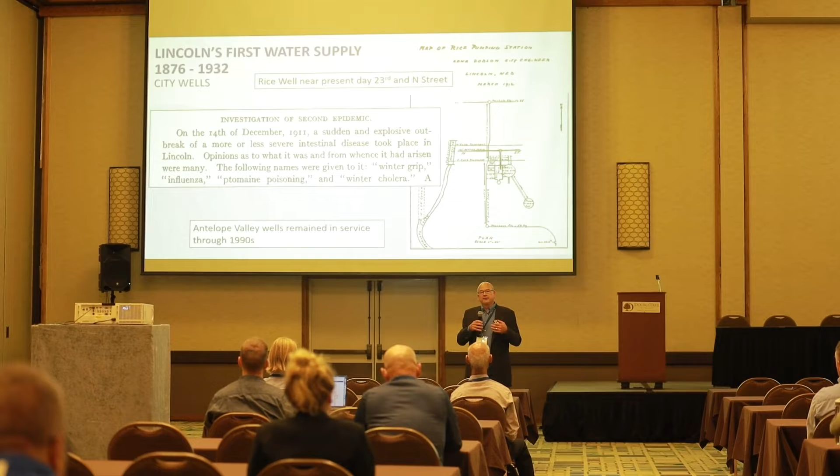This is all about how Lincoln is going to supply water to the masses into the future. I like to start off with a little bit of history, and then I'll set this up by talking about our planning process - how do we come up with the amount of water that is projected that we need to serve our customers. And then I'll end up with the process that we went through to get to a tentative decision.

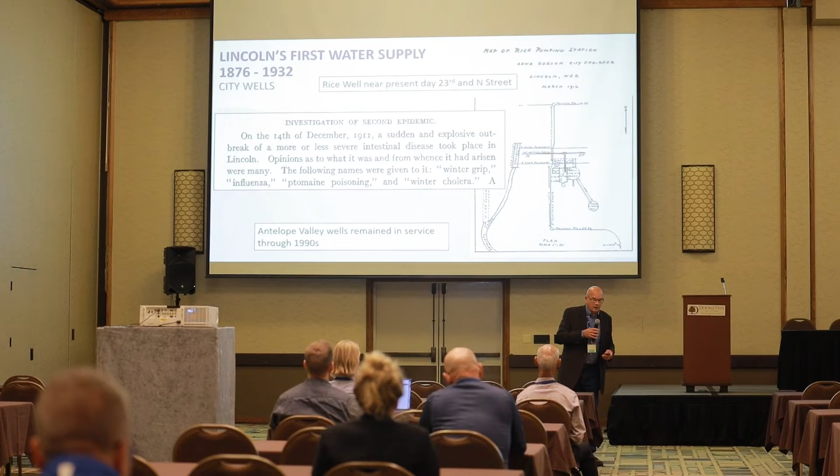So I warned somebody after lunch I was going to start off with the first slide talking about influenza, stomach illness, and those kinds of things. Maybe that's not a way to start an afternoon session.

Our history started in Lincoln in 1876. That's when we municipalized the water system, and we used a series of wells. These wells were cistern-type wells, very large diameter, dug down into the ground, bricked up, pumps were put in them, and then water was pumped, no treatment, out to our customers.

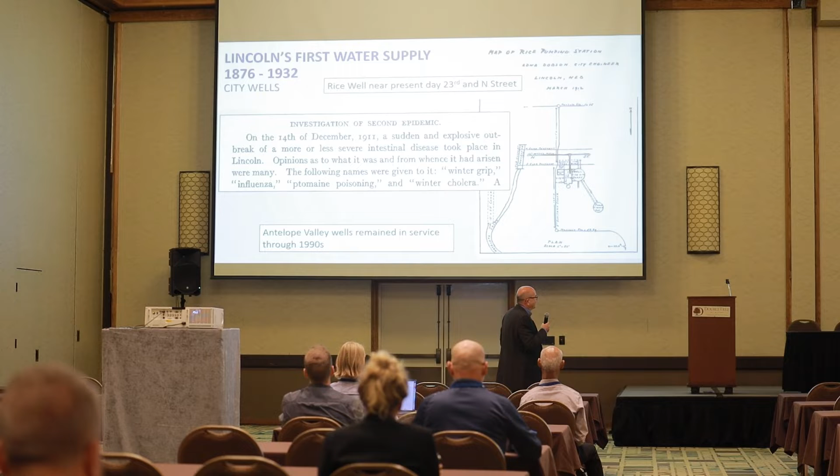There were 2 incidences in history of some pretty serious outbreaks of typhoid fever, as it was termed back in the day. This was an excerpt out of one of the reports that talked about one of those incidences. It's interesting how they describe it: a sudden and explosive outbreak of more or less severe intestinal disease.

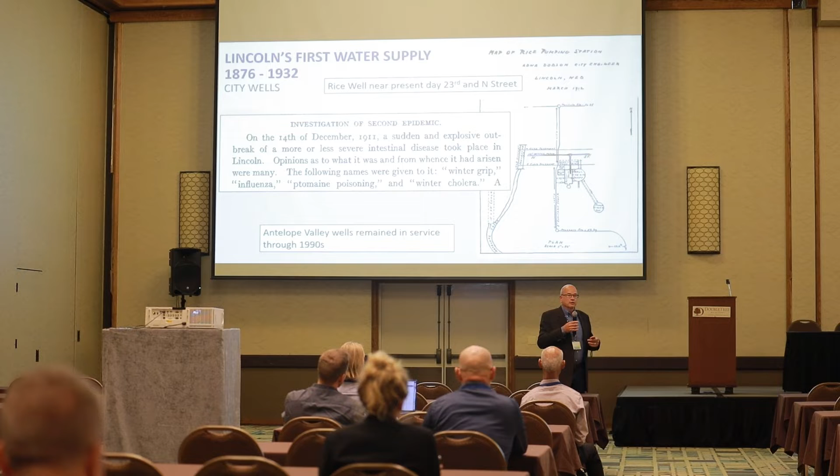What we learned was - this is a diagram of the well, and this is a sewer line that went past the well. Because of some heavy rain events and a broken sewer main, there was sewage that went into this well, and that's what really caused the sickness.

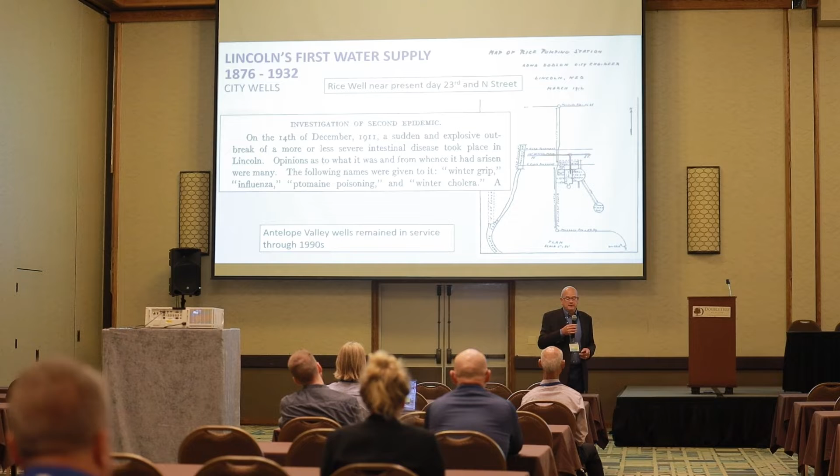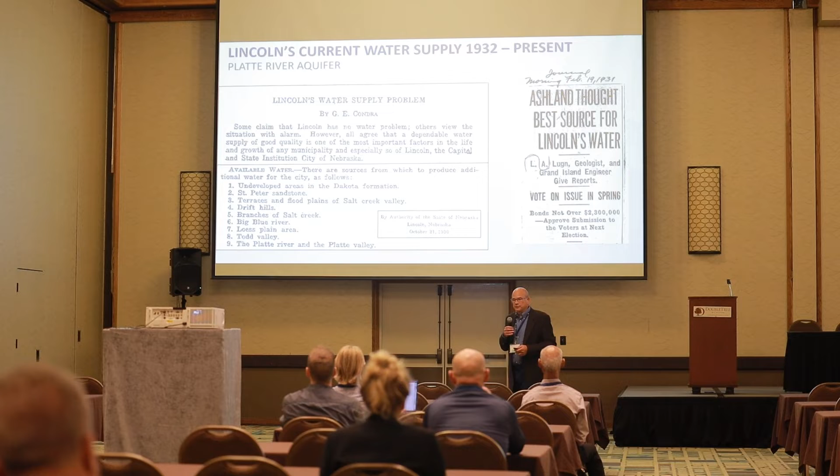We supplied Lincoln with wells throughout the city through about 1932. Then our forefathers and foremothers realized that as the city was growing, the water quality and water quantity in the Salt Creek Valley area was just not sufficient. Capacity or supply was not sufficient, and the water quality was very poor. A lot of these wells were in the Dakota Aquifer, so high dissolved solids, salt, and folks came to realize that that wasn't going to be a sufficient supply for the city of Lincoln.

What I found interesting in both of these examples of our early days of supplying water was EPA wasn't around. The public water supply industry had not evolved by that time. This was all university people weighing in on: is there enough capacity? What is the water quality? How do we track down people getting sick? So all of this was really coming out of the university at the time.

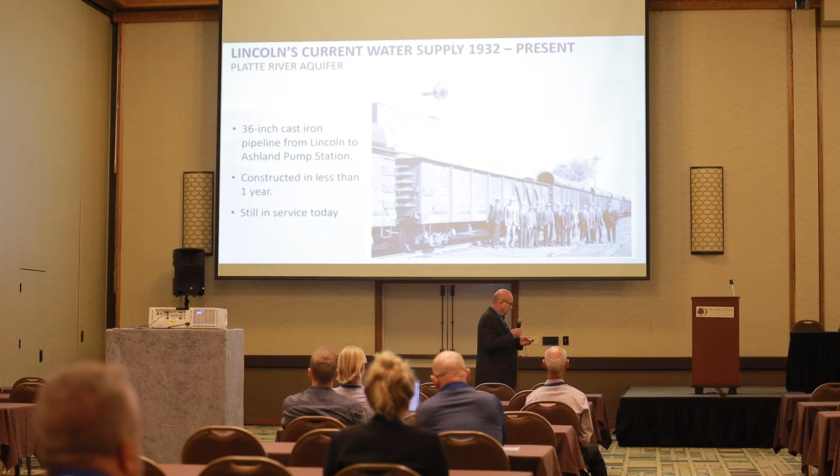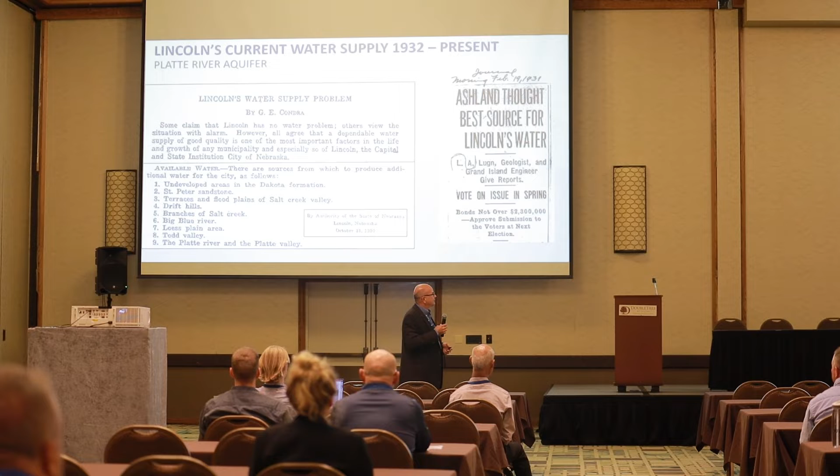If you go back and remember this list of potential water sources that were being tossed around back in the late 1920s and early 1930s, this list sort of looks similar to the list that I'm going to talk about with our Water 2.0 project. The point is that there are lots of different water sources, and some of those are questionable quality, and some just simply don't have the capacity. So it's interesting that essentially 100 years ago we were looking at what the next source of water was going to be for the city of Lincoln. We're doing that now as we speak.

This is an example of a train load of 36-inch pipe once we decided to move to Ashland and develop that supply along the Platte River. This was a load of pipe that really joined the city of Lincoln to the Ashland well field, Platte River well field. That pipe is still in service today, runs down the shoulder of Highway 6 for the most part, goes down into our A Street reservoir system, and provides good service for us today.

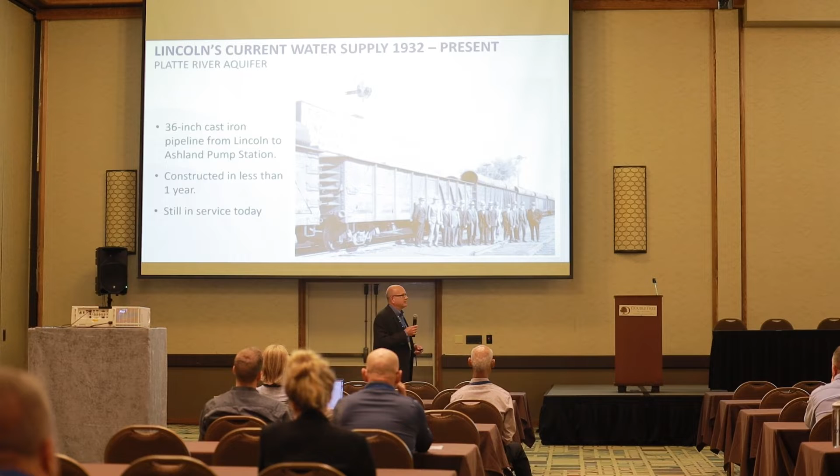What's really interesting is that pipe was laid in less than a year. And I think most of us in this room would agree that that's almost an impossible feat in today's world of permitting, supply chain issues, and those kinds of things.

So things were fairly good. When we developed that well field, we started to send water from the well field down to Lincoln. But we noticed, or our customers noticed, that the water was turbid, and complaints started coming in. We did no filtration and no treatment originally when we developed that well field. So it was pretty obvious that we needed to do something to remove iron and manganese.

There's parts of this early plant that was built in 1935 that are still in service today. In fact, we've got a project right now to get into some of those original filters and take a look at the understructure of the filter to see if that structure is still sound. But the filter media that was put in the early 1930s is still in service today, giving very good performance in terms of iron and manganese removal.

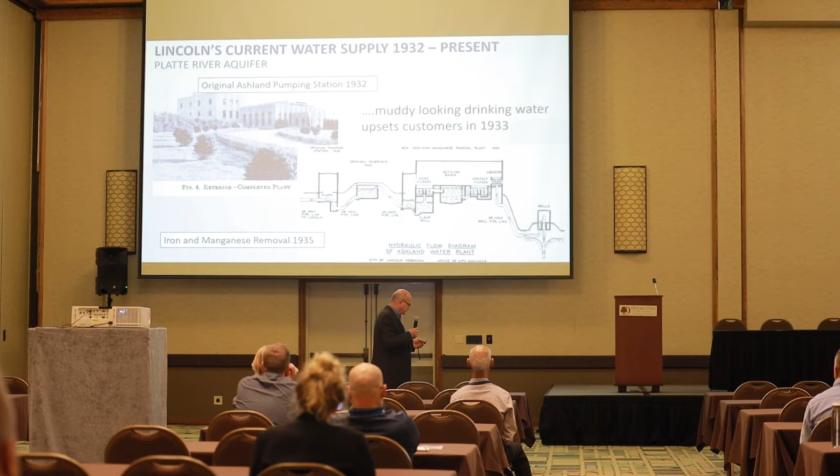So a little bit about water use trends. Several of us talked a little bit about this in some sessions yesterday. A lot of folks don't realize that per capita water use has really declined. And this is not unique to Lincoln. MUD would have this same trend, and this is a trend you see across the country. In fact, Doug Whitfield made mention yesterday of one of the effects of declining water use, which is revenue.

So it's always a hard message to go out and promote water conservation with your customers, while what's happening in the background is declining revenues. This hasn't really hit Lincoln Water so much, but there are water utilities, especially out west, who have really had to grapple with this issue. So you charge by a gallon of water, and if your customers are using less water, you've got all these fixed costs associated with your facilities, so the rates go up.

So we've gone from in the early 1970s, 200 gallons per day per capita, to 132 in present day. And this is total water use - all the water use, commercial, residential, industrial, divided by the population. About 65% of this is used at the home.

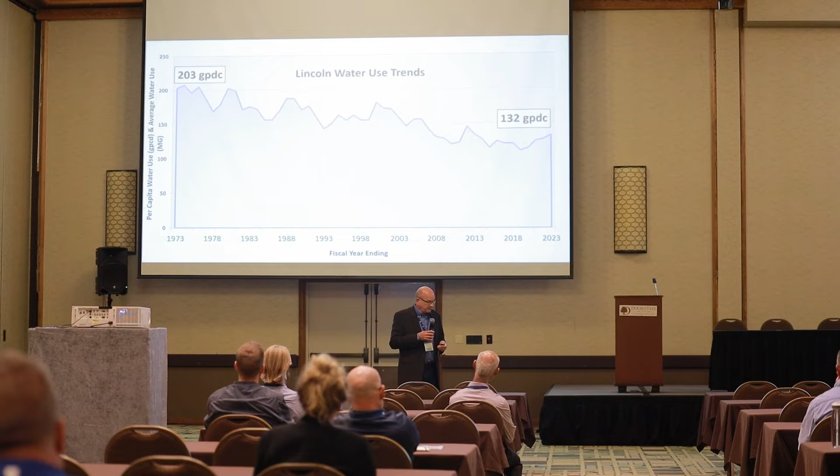So when you splash some other trends across this, what's really telling is that as population has increased - for Lincoln, a little over 1% a year population increase - with this trend of declining per capita water use, it's very telling that our average day water use has remained flat during that same period of time.

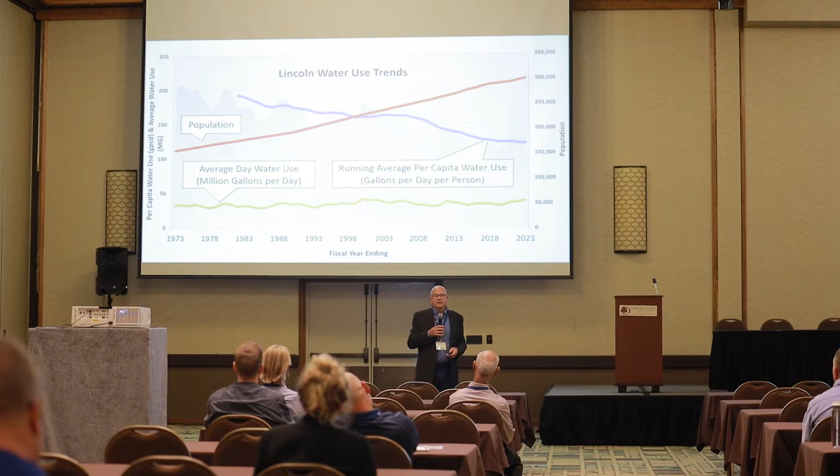And it's interesting that even in times of dry periods, our per capita water use has declined. You might ask why. Probably, and I think mostly, just an awareness that our customers have on the value of the resource. There's been certainly some technology - I always say, love them or hate them, automatic irrigation systems, but if maintained properly, they can actually efficiently apply water to turf. So there might be a little of that going on also.

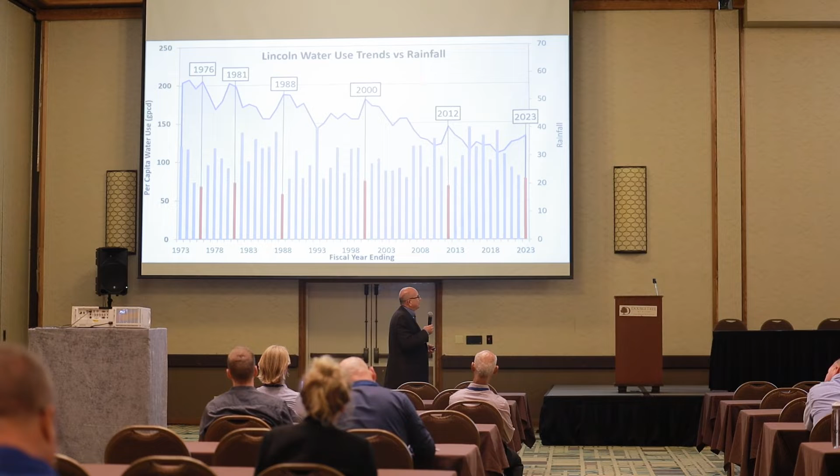So our historical water shortage events - this is really what's driving us to figure out how much water do we need. Like it or not, our customers are the ones that decide how much water they're going to use. We can influence that a little bit with rates. I talked yesterday about Lincoln's water conservation rate, or as Rick Kubat explained it, it's an increasing block rate structure. So in our residential rates, there are 3 blocks of rates. The first block is the cheapest, and it's intended to really target indoor water use.

It's really this idea of summer or seasonal water use that drives the need to have enough source water. There are other things that drive our facilities. Peak hour use is mostly tied to water storage in our distribution systems. Daily use is more about pumping and transmission, but seasonal water use is what drives our need to make sure we have enough source water supply.

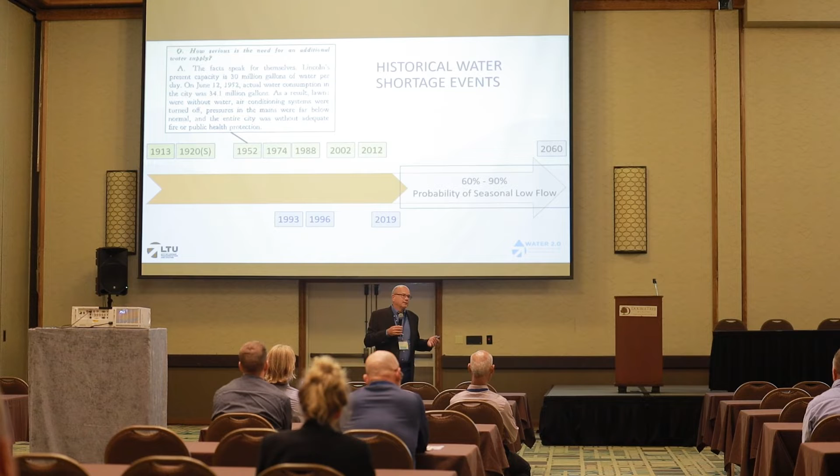Yesterday I showed the slide about the article in the Huffington Post, from research out of the University of Florida, saying Lincoln was third nationally for significant water shortage risk. I mentioned I'm not sure the research was sound, but the premise was that the Platte River goes dry — it disconnects itself in a lot of dry years, around the Grand Island area. So if your water source is the Platte River, I can see how you'd reach that conclusion.

Our mandatory conservation efforts are essentially designated-day watering, again targeting turf irrigation. There was information yesterday at the last session from County Extension saying 30 to 40% of water is used in turf irrigation. I'd say on a hot summer day with extended dryness, you could be over 50% of the water we're producing and sending to Lincoln used for turf irrigation — very significant. So here's the flood event.

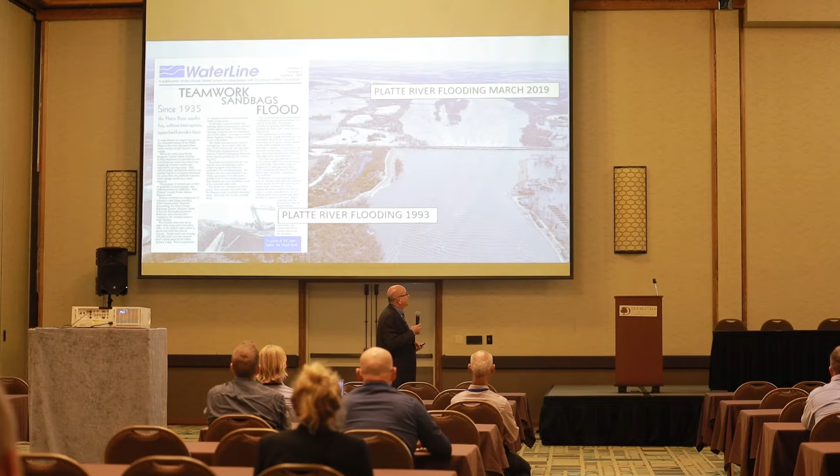The photo shows the 2019 event, and it was just a vast amount of water that came down the system. I think those of you involved would agree it just kept coming and never stopped. The peak was a long-lived peak, and it prevented us from getting out to our facilities. We had to mobilize the Air National Guard to fly folks out to our well fields to operate valves and get our wells back operating. It was quite an event. We spent probably a week flying in helicopters and airboats to operate our system.

And in 1993, we were in the process of putting in a large transmission main, a second transmission main out to our well field. That got taken out. So these events are very, very significant and can certainly cause water shortages.

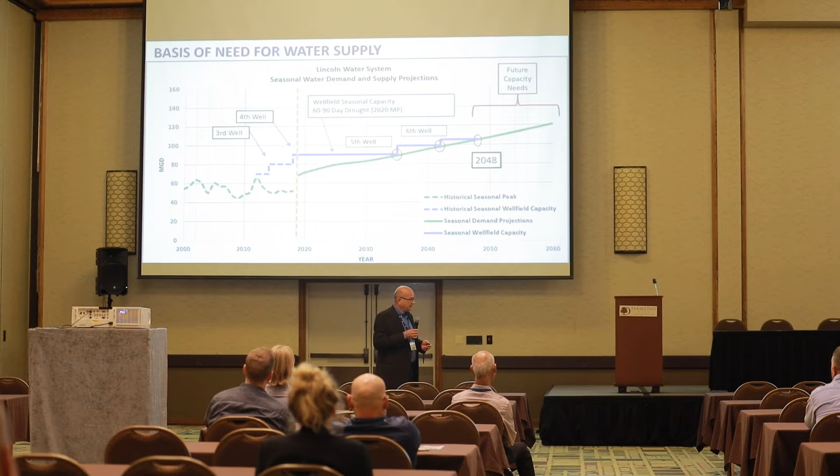This is an example of how making these adjustments for climate change using these climate prediction models can really influence a number, so to speak. This is on the supply side. If we use the historical database and look at the time interval for these events, you can calculate a probability that they may occur in the next planning period. We're looking at a 40-year planning period, and the recurrence interval on these events can then be used to determine the probability that the event may occur. This particular event is a 90-day event.

So where the average stream flow would be 1,500 CFS, 700 CFS, and 200 CFS, if we use the historical data to do the evaluation, that's the probability those events may occur—again, 90 days of the river being at 700 CFS or less. The reason we chose 700 is that's our in-stream flow rate. When the river begins to get in that 700 CFS range or below, that could be a point where Lincoln exercises its right to that amount of water in the stream. Not something we've done, but it's sort of a tool in the tool bag for us.

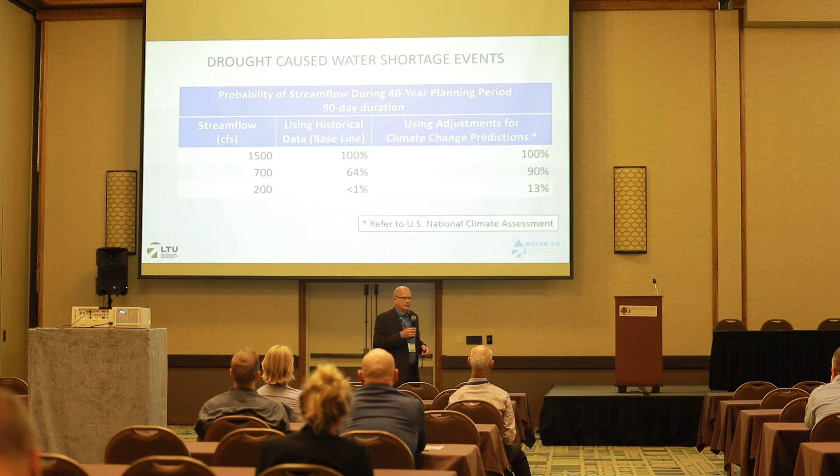But when we look at climate change and make the adjustments, you can see how the probabilities are affected. What's interesting is in that 200 CFS—historically we've not seen 200 CFS in the Platte River for a 90-day stretch, so the percentage is essentially nothing; the probability of that happening is essentially zero. But as we start to put this idea of climate change into the model, you can see there becomes a chance that the river gets down to that level for that long a period of time. That's pretty significant—would be very significant for us.

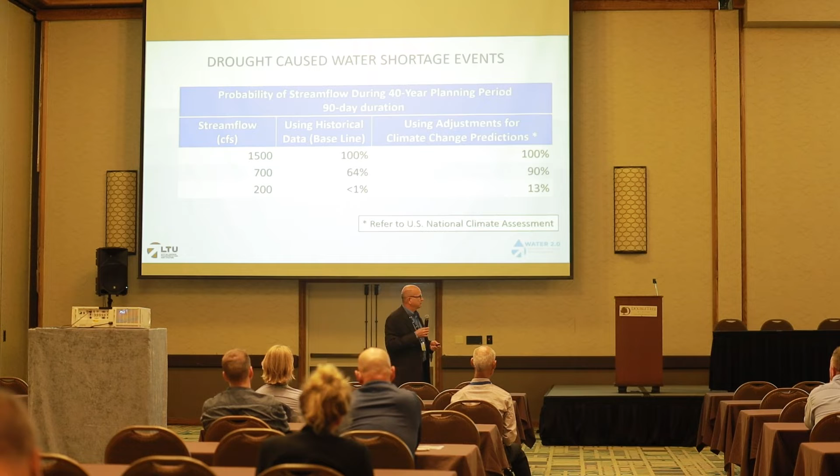So that's kind of the setup, a little bit of the history of the utility, how we plan and make projections for what our customers are going to use, and the performance of our current well field.

Knowing all this, we've been talking about a second source of water supply for several years. It's not really new in our vocabulary, but it was certainly time to pull the trigger. Mayor Gaylord Baird had the foresight to say this is something her administration was going to start working on. She commissioned a water source advisory council of a really diverse range of folks with diverse backgrounds - a great example of what I like to refer to as diversity of thought.

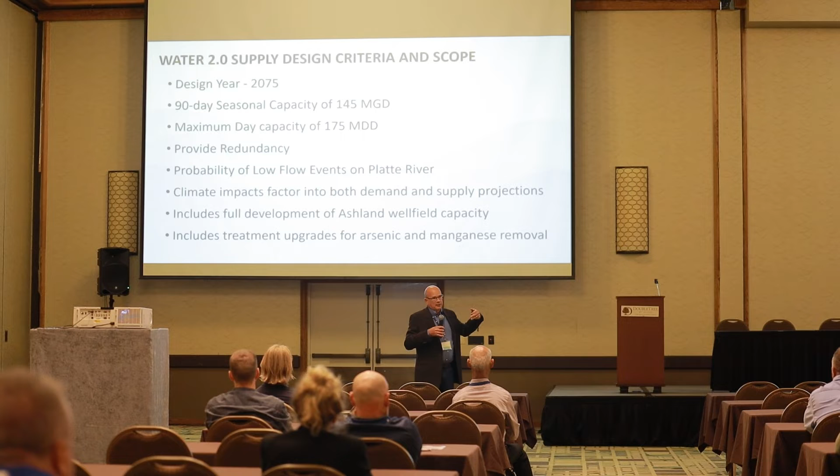It looked at these low flow events on the Platte River. We included climate impacts into the supply and demand projections. One thing to keep in mind - our Water 2.0 comprehensive project anticipates building out full development of the Ashland well field capacity, which also includes treatment upgrades so we can treat this additional water coming from the Platte River well field, targeting arsenic and manganese removal. So this is really the Water 2.0 scope and design criteria.

So the activities that the Water Source Advisory Council went through - by the way, we had a long debate on whether to call them a council or committee. We ended up with council, and unfortunately, whenever you say council, people think the city council was involved. We had representatives from the city council, but this was an entirely separate group of people.

The first order of business was to develop factors - what was important to each of the stakeholders on that committee as they think about their constituents and the people they would have to go out and educate on this whole concept of developing additional supply for the city of Lincoln.

Within two meetings, this group was able to define the factors or criteria that were important to them and what we wanted to evaluate with these different alternatives.

We wanted them to consider the universe of alternatives. We didn't want somebody to say, well, why didn't you look at this source of water? How come you didn't consider that? So we initially looked at 14 different sources of water, did an initial feasibility evaluation on all those alternatives, and eventually narrowed it down to 7.

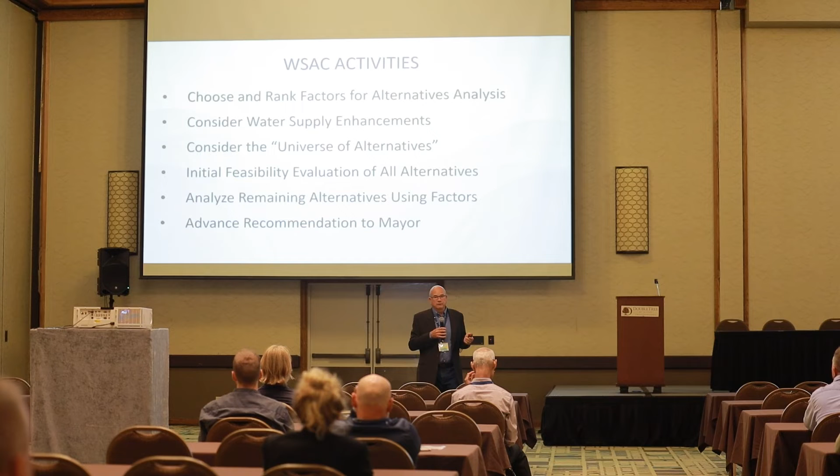Aquifer storage was another one of those supply enhancements. We realized that technology is something worth looking at, but it certainly wouldn't solve our problem to get us to 2075 and 145 MGD capacity.

And then finally, really sit down and hammer out this short list of alternatives and make a recommendation to the mayor. That was the charge statement.

So this is a list of the factors that were used and that the committee came up with. Really, staff and our consultant who facilitated this, we sort of stayed out of the mix. Our director and assistant director were representatives on the council, but we really stayed out of the mix.

And at times that was difficult because we had our own opinions. We, of course, know the business, but we found a way to just sit back, provide facts, provide figures to the group, and let them sort through all of these different factors.

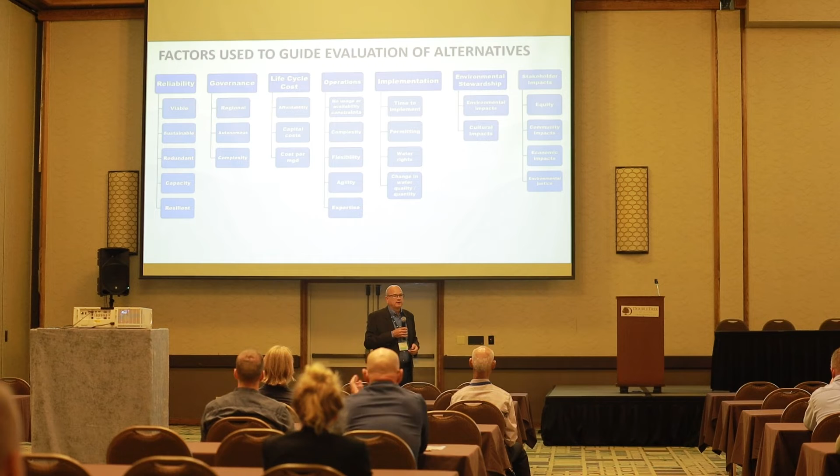We even had sub-factors under those main ones that the council worked through. So every month we would have a meeting and cover two or three of these different factors, and we would actually have the council rank them. So it was a very objective process, and I'll show you some examples here in a minute.

So this was kind of the universe of alternatives. I had mentioned earlier with that first or second slide - that list you saw there kind of stacks up to some of these alternatives. There is water out there, near Lincoln, mostly groundwater sources, but the capacity of those sources is just not sufficient to meet that design criteria we were trying to meet.

Water quality, sometimes questionable. So in really one meeting, as we went through each of these and talked about them from a technical aspect, the council got to this short list of seven alternatives to look at further. So, expand the existing well field, our Platte River well field.

Look at off-channel surface water reservoir, which was mainly storage. So simply, during winter periods or off-peak, we would be taking water from our existing Platte River well field, developing a storage reservoir, and then using that water the next season. That definitely can be done, has been done, but in the end didn't rank so high.

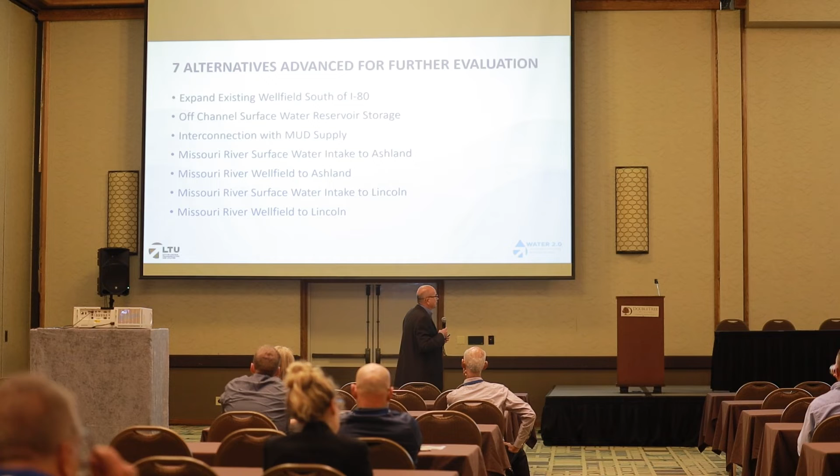2 of those alternatives took water from the Missouri River, took it up to our Ashland facilities, and then back down through our existing transmission to Lincoln. Of course, the issue there is redundancy - we're still relying on a portion of our facilities to make that happen.

2 of them along the Missouri River were to treat at the river and then deliver treated water back to Lincoln. And in each of those groups, we looked at a surface water intake versus a well field. So those were the 7 alternatives that the council worked through.

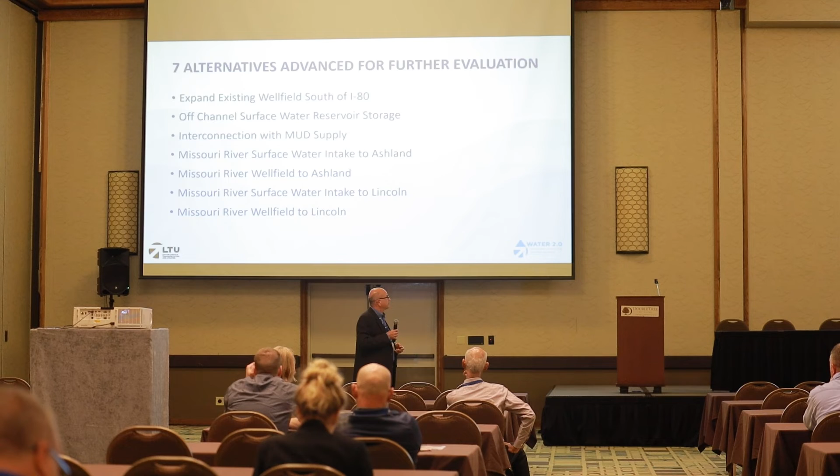This is just a couple of examples of how these were scored. So at the end of the discussion, where we would present again on a factual basis the information that underpin these factors, the council would then rank using what they believed was important, thinking about their constituents, their expertise in their particular area, their experiences, rank each of these factors.

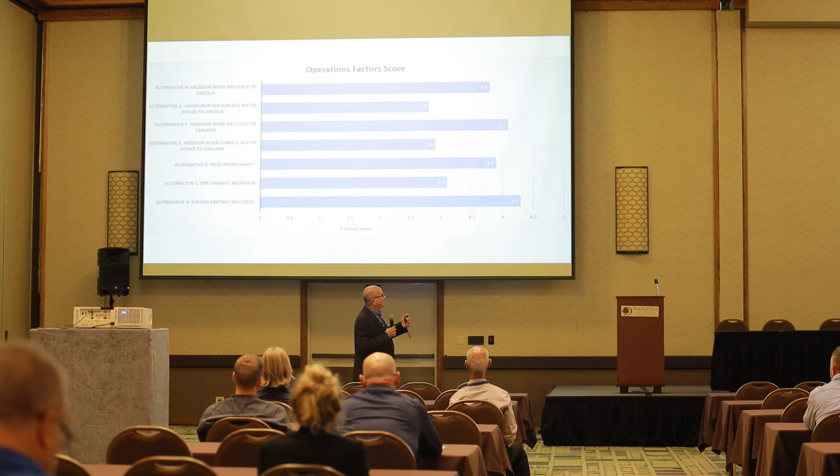So here's an example of the operations criteria. How easy or difficult were these sources to operate? This one was a little hard for me to stand back, but it's interesting. You can kind of see, for those of you that are knowledgeable of what it takes to operate a surface water system versus a well field system, something that has an open reservoir on it, the council did sort of line up as you would expect.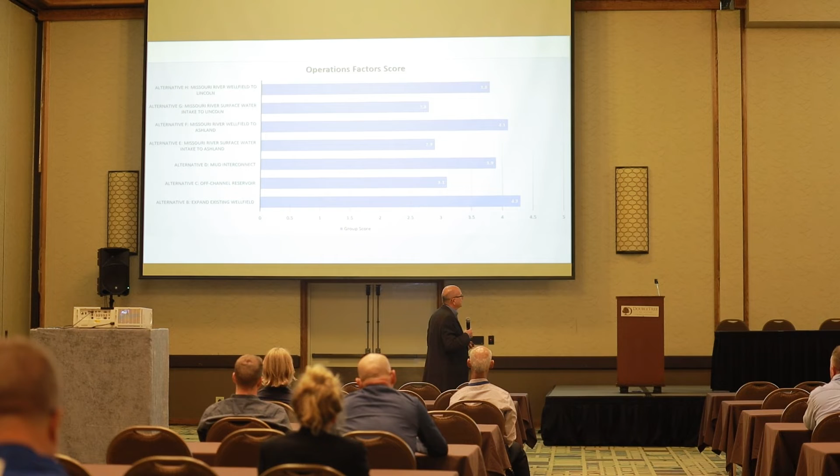So you can see that the surface water, both the surface water intakes on the Missouri River, ranked low. That off-channel reservoir I mentioned also kind of ranked low. Anytime you're dealing with surface water, it's a whole new set of regulations that you have to abide by.

Here's a governance group, and I asked our MUD friends yesterday if they were opposed to me showing this, but this really got at an idea that was pretty apparent, that Lincoln and this group representing Lincoln were very keen on making sure Lincoln maintained its autonomy, that we were not beholden by contract on a supply of water.

Now, in the public water supply business, that isn't necessarily how it works. I think there are examples. Matter of fact, there was an example, I think, down in Arizona recently, where the public water supplier turned the valve off to a small group of folks that, by contract, were being supplied water. But that doesn't normally happen, but it can happen.

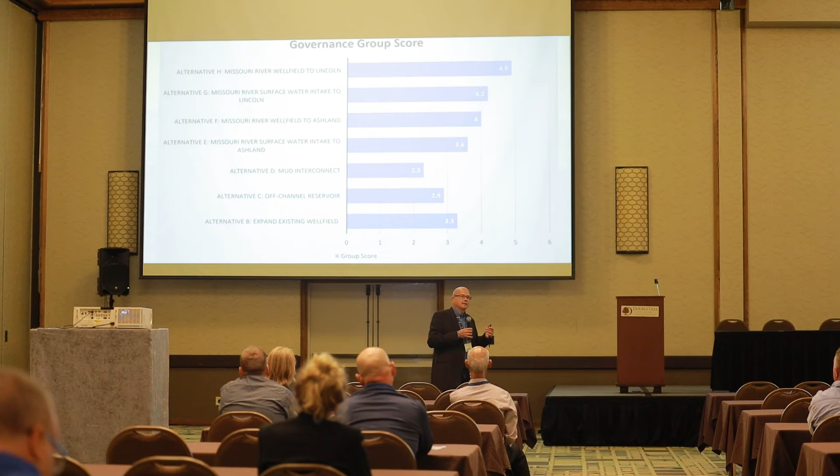And then you have a whole rate side of it. How would Lincoln ratepayers be represented through this connection with MUD? Well, you can kind of see how the group lined up. They were concerned about the whole idea of autonomy and control. And so these alternatives going to the Missouri River, having control of our system, really then ranked high in the group's mind.

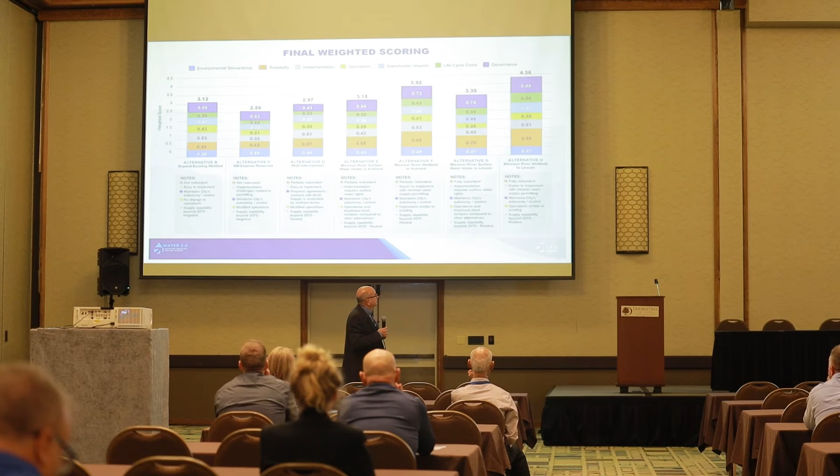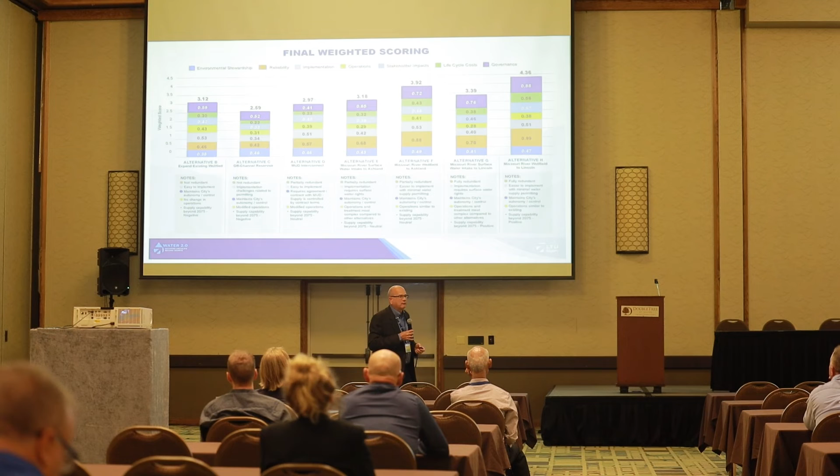So this is an example of the final scoring. The different 7 factors might be a little hard to read, but we're starting to see where alternative H, which is going to the Missouri River, developing a well field, and treating water at the source, bringing it back to Lincoln, begins to take some traction. You can kind of look at this as a cost benefit. It certainly doesn't meet up with the definition of a cost benefit, but this is really what that ranking number begins to show, how favorable these different alternatives are.

So you throw cost on there, that's the white dot. For those of you in the back of the room, these are in millions of dollars. So we're talking about the MUD interconnection, 1.39 billion. The alternative H, which again is Missouri River, well field and treatment, about 1.39 billion.

You might ask, well, how come the MUD option was of that cost? Well, they have to do a lot of improvements to their system, and we want to make sure that connection is reliable. So they did a lot of engineering work on their system to come to a cost on what they would have to do. And of course, we're going to bear the cost of that through some type of an agreement.

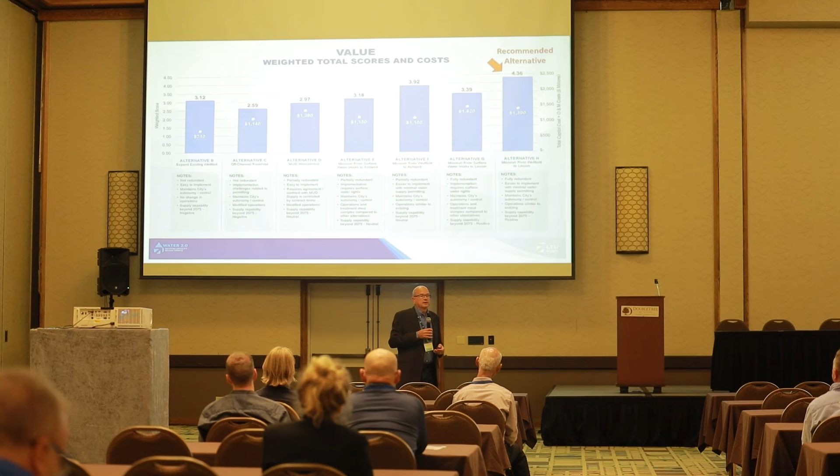So the recommended alternative that was forwarded to the Mayor was this alternative H. It was one of the more costly alternatives, but it certainly was of high benefit, high value to the council members. And this just mirrors some of the notes. You couldn't read those, but this is really what they came up with when you would ask the council collectively, hey, summarize and explain why you felt this alternative H made sense.

It's fully redundant. So you're not using facilities that are already in our system. It's a fully redundant system. So, when you're thinking about a 2019 flood event coming down the Platte River, there are chances that not both of your supply sources will be interrupted. Now, I know some of you in the room are saying, wow, were you at the Missouri River in 2019? There was a lot of damage and a lot of water coming down the river then.

The idea is that these collector wells that I mentioned really are pretty stout. They are founded on bedrock. They can be constructed in the floodway. The problem is you've got to make sure they continue to be powered, and you have to have a way to get to them, and those can all be designed in.

So ease of implementation and minimal water supply permitting, we believe that's the case. Of course, nothing is going to be without permitting, but we believe that alternative offers that. And again, that third bullet we just talked about, it maintains the city's autonomy, and also allows us to maybe consider regionalizing and providing and dropping off finished water

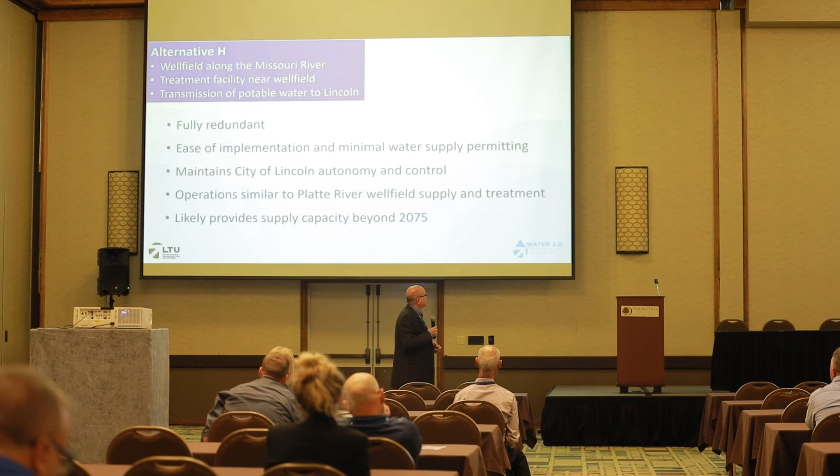to others along the way. That was - I didn't show that factor - but that was another factor that was considered and really got this alternative H moved up: our ability to provide regional supplies. And certainly it provides capacity beyond 2075. So here's conceptually what we're doing with this alternative H.

Once the recommendation was accepted by the mayor, we moved immediately into a validation phase. So again, this is all conceptual at this point, but we're now validating and making sure there aren't any fatal flaws with this concept. So we're looking at pipeline alignments. We're down drilling as we speak along the river and doing aquifer testing and hydrogeologic investigations.

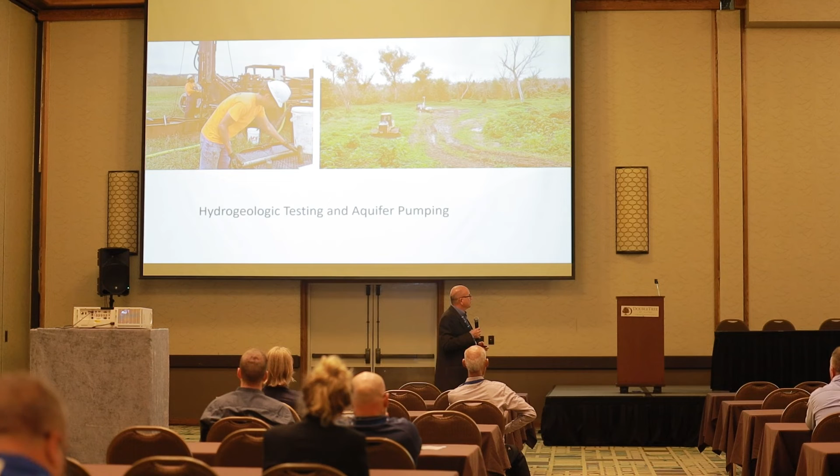So it's go time for us. Here we are down at the river. This was probably 2 months ago.

So our next steps, we're going to continue the validation, make sure that this alternative can be advanced from a technical standpoint. There's a huge cost component in this. Also, we're looking at where will the X mark the spot for the well field and for the treatment facility. Looking at conveyance back to Lincoln - those are significant steps to develop.

And always remind folks that the Water 2.0 project involves continued build out of the Platte River well field and upgrading our treatment facilities. And we are already beginning design on the first leg of transmission that will join the two water sources up. So this would be a transmission main, for those of you that are familiar with Lincoln, along the 98th Street corridor.

So once that transmission main gets constructed here in the next couple of years, there literally is a T in the line that would be for the Missouri River water source. So we can get water going both ways.

We were fortunate to have Senator Bostar and Senator Wishart get us, or develop, kind of a path forward with funding. And so in the two legislative years, 2022 and 2023, we've been the benefactor of about $197 million to get this work done. These funds are significant - they do have deadlines associated with them - but the point is we're confident we can get this done. We've got several engineering contracts, and work has already started in earnest on all of these projects.